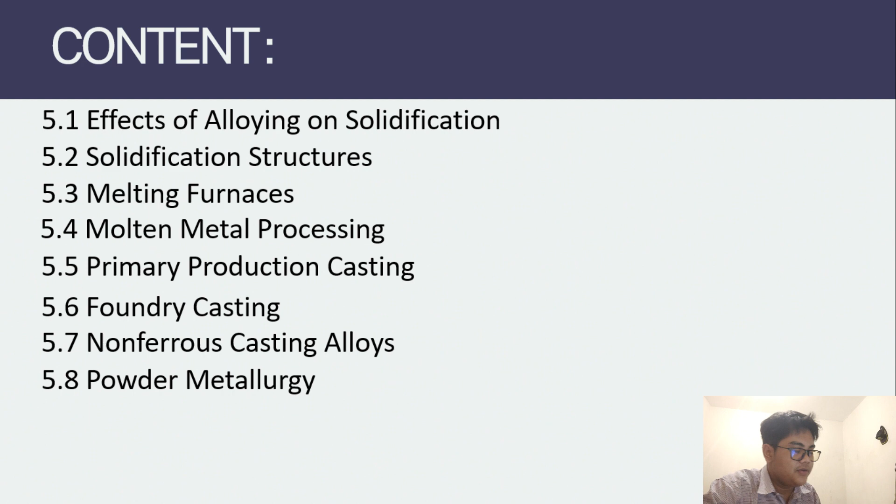We go to the content: 5.1, the effect of alloy on solidification; 5.2, solidification structure; 5.3, melting furnaces; 5.4, molten metal processing; 5.5, primary production casting; 5.6, foundry casting; 5.7, non-ferrous casting alloys; 5.8, powder metallurgy.

We jump to 5.1, the effect of alloy on solidification. The solidification of alloy is a complex process and is most easily understood by explaining how the solidification characteristics of alloys differ from those of pure metals. This is a topic discussed to some extent in chapter 2 and is briefly expanded in this section.

We got solidification of pure metals. When a pure metal begins to melt, the solid-liquid mixture stays at the melting point temperature until all of the solid has completely melted. The amount of thermal energy needed to complete the transformation from solid to liquid is defined by the latent heat of fusion of a material.

For example, pure aluminum begins to melt at a temperature of 660 Celsius and has a latent heat of fusion of 398 kilojoules per kilogram. If 1 kilogram of solid aluminum is heated to 660 Celsius, then the addition of 398 kilojoules of thermal energy would be required to completely melt the aluminum.

Although heat may be continuously applied, only after the material is entirely liquid does the temperature begin to rise again. Conversely, pure metals give up their latent heat of fusion and solidify at a single temperature. If a pure metal is melted and allowed to solidify in a melting crucible, a thermocouple placed in the metal during solidification could trace a cooling curve like that shown in figure 5.1.

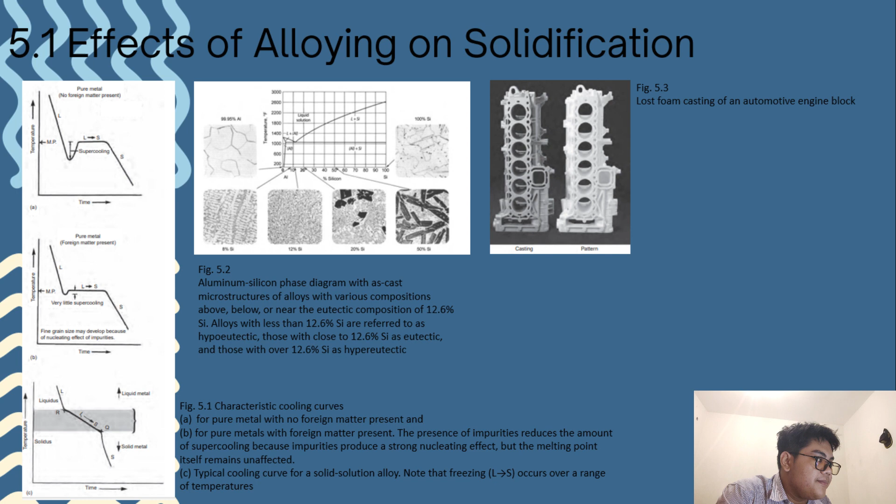We go to the next, 5.2, solidification structure. The solid-liquid interface during solidification normally exhibits one of three types of crystal growth in the liquid: planar, cellular, or dendritic growth, as shown in figure 5.4, where we can see the effect of undercooling on solidification structure.

The type of growth is controlled by the manner in which heat is removed from the system. When the liquid ahead of the solid-liquid interface has a positive temperature gradient, heat is removed from the liquid by conduction through the growing solid. Because the temperature gradient is linear and uniformly perpendicular to the interface, a smooth interface is maintained, and the growth is planar into the liquid.

When there is a temperature inversion and the temperature decreases ahead of the solid-liquid interface, then either cellular or dendritic growth will occur. The difference between the two is a matter of degree. Small undercoolings tend to produce cellular growth, while large undercoolings tend to produce dendritic growth. In pure metals, undercooling can result from thermal supercooling, while in alloys it can result from a combination of thermal and constitutional supercooling.

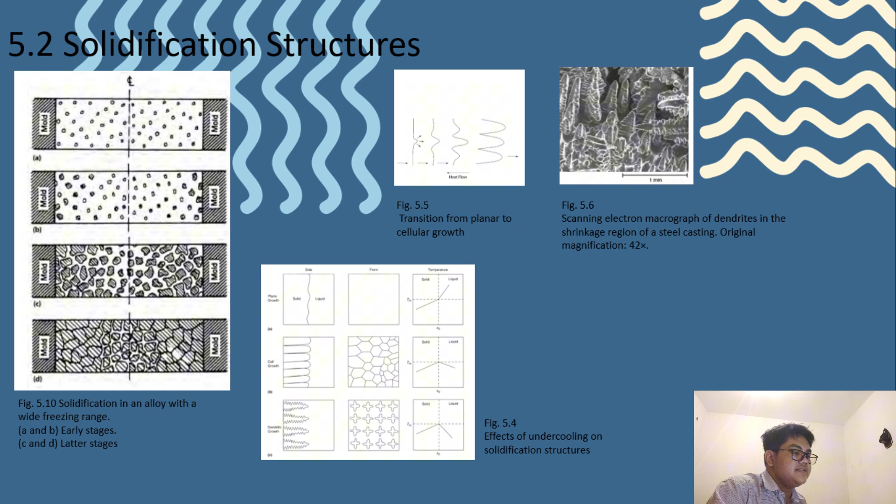Next, we got 5.3, melting furnaces. A wide variety of furnace technologies are available for melting metals. In steelmaking, for example, pig iron is produced in a blast furnace from iron ore, limestone, and coke because it contains excessively high levels of silicon, manganese, carbon, and other elements.

In figure 5.11, we can see the microstructure of a thixocast or semi-solid processed magnesium alloy. In figure A, we can see conventional etching, and in B, electrolytic etching and polarized light illumination. In figure 5.12, we can see a schematic illustrating the morphological transition under forced convection to develop a semi-solid structure.

The liquid iron, together with scrap and fluxing agents, is then introduced into either a basic oxygen furnace or an electric arc furnace for further refining with oxygen. The objective is to reduce the silicon, manganese, and carbon to acceptably low levels in the resulting steel.

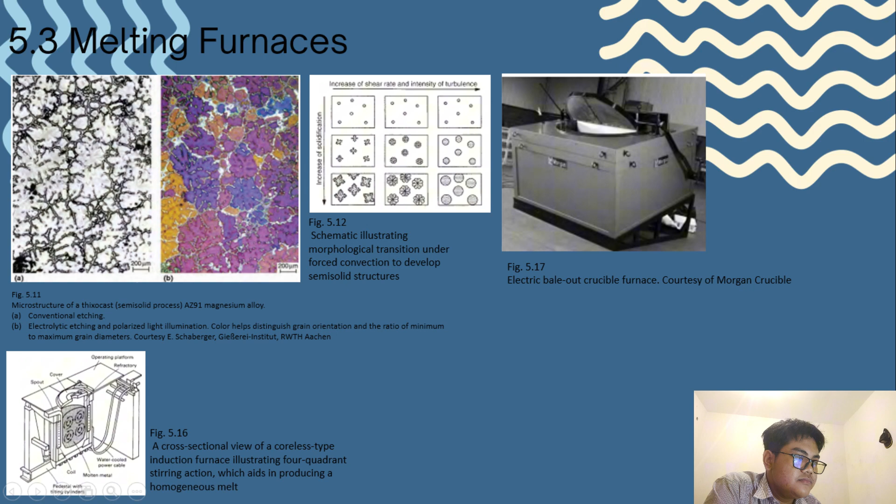Then we got to the next slide, 5.4, molten metal processing. Molten metals are processed and handled in various ways depending on the alloy and melting practices that are used. Melting is a basic way to combine elements for the purpose of alloying, and the overall chemical composition of the molten alloy must be carefully controlled and processed before casting can take place.

The reactivity of molten metal at high temperatures also requires special processing techniques for removing or preventing the formation of inclusion impurities or dissolved gases in the melt. As noted, ladle treatments may follow furnace melting, and various examples of ladle treatments for steel can be seen in figure 5.14, the examples of ladle treatment used to refine molten steels.

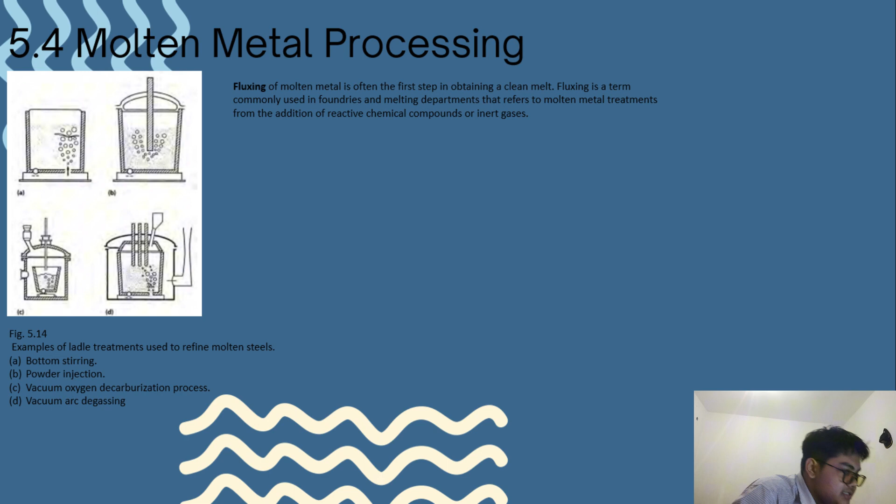We get four pictures here: A, bottom stirring; B, powder injection; C, vacuum oxygen decarburization process; and D, vacuum arc degassing. When a primary furnace is emptied into a tapping ladle, the steel can be transferred into other ladles, furnaces, or vessels for treatment. With ladle treatment, steels with sulfur as low as 0.002% can be produced that are essentially free of oxide or sulfide inclusions.

Then we get to fluxing. Fluxing of a molten metal is often the first step of obtaining a clean melt. Fluxing is a term commonly used in foundries and melting departments that refers to molten metal treatments from the addition of reactive chemical compounds or inert gases. The various functions of molten metal fluxing additives, either singly or combined, include:

A. Removing inclusion impurities or dissolved gas from the melt. B. Preventing excessive formation of solid phase inclusions. C. Preventing or removing oxide buildup on furnace walls. And last, injecting or distributing alloying constituents.

Those fluxes are commonly used to some extent with virtually all molten metal operations, both in a foundry and in production of mill product. Fluxing can occur throughout the various stages of melting and handling of molten metals, from the melting or holding furnaces to the transfer ladles. Molten metal fluxing agents may be chemically active solids, inert gases, or a chemically active gas. The type of flux depends, of course, on the composition of the melt and refractories.

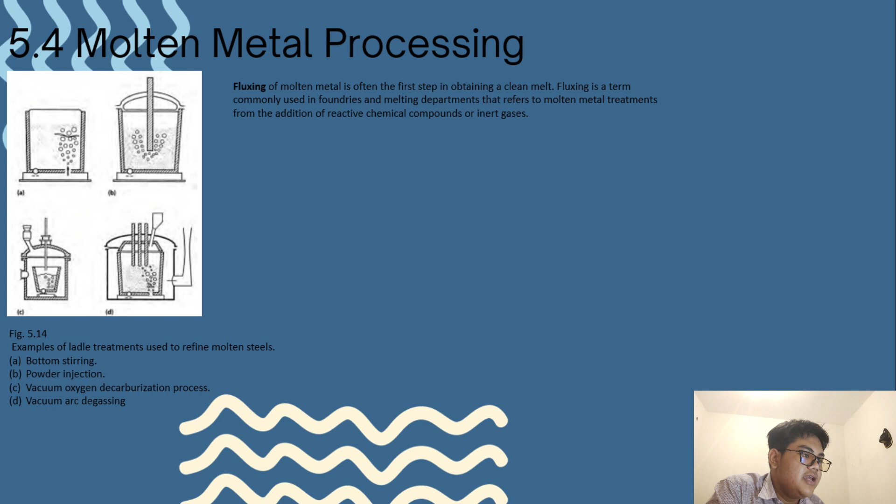Next, we get 5.5, primary production casting. The primary production of metal normally involves either ingot casting or continuous casting of products such as strip, sheet, wire, or bar. Continuous casting offers certain benefits over static casting, but not all metals can be continuously cast. Products are typically cast in ingot form for subsequent hot working reduction operations.

Static ingot casting. Several ingot casting processes have been designed and developed for downstream manufacturing processes. The most common is static ingot casting, where molten metal is poured into a vertical open-ended mold. The mold is made of metal, usually cast iron, and is tapered along its length so that solidified metal can be easily withdrawn from it. The fundamental requirements that must be satisfied by an ingot are capacity to withstand subsequent mechanical reduction operations without rupturing or cracking, with the capability to yield a commercially acceptable finished product.

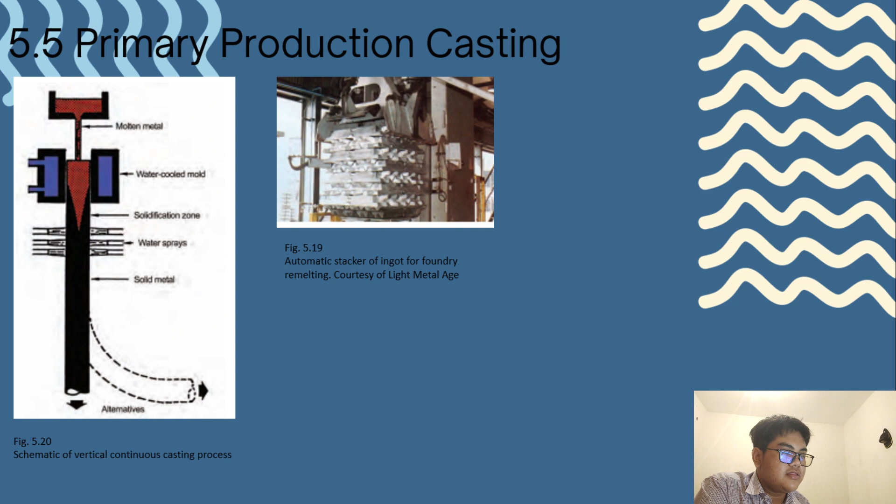In another process, the product is bent so that it emerges horizontally from the casting machine. With this setup, casting time is limited only by the amount of liquid metal that can be supplied to the caster. The product can be cut to any desired length, or it can be fed directly into other processing equipment. Specific grades of aluminum, stainless steel, and copper are commonly produced using this method.

Aluminum casting alloys. Aluminum casting alloys are the most versatile of all common foundry alloys and generally have the highest castability ratings. As casting materials, aluminum alloys have these favorable characteristics: 1. Good fluidity for filling thin sections. 2. Low liquidus temperatures relative to those required for many other metals. 3. Rapid heat transfer from the molten aluminum to the mold, providing shorter casting cycles.

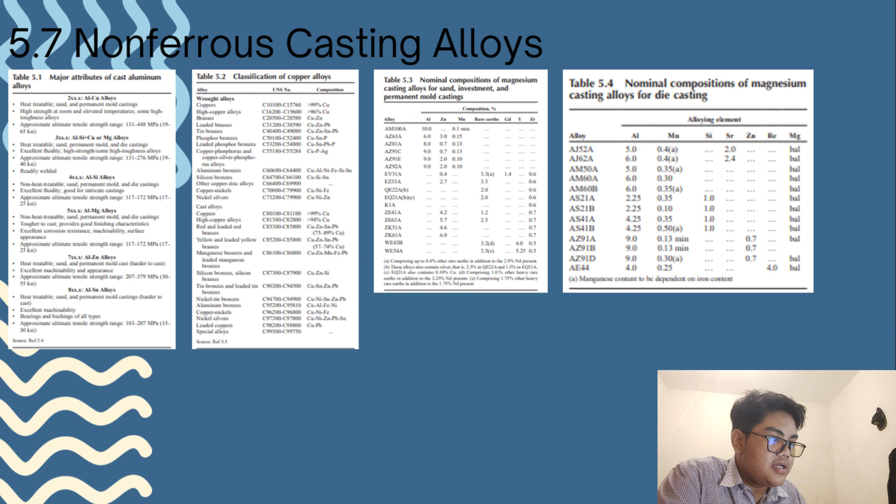Okay, we go to next, 5.8, powder metallurgy. One of the more recent metallurgy developments in the manufacture of modern alloys is the development of powder metallurgy, or PM processing. Metal powders can be produced using a wide variety of mechanical methods as well as by chemical and electrochemical methods. Atomization is the dominant method for producing metal and pre-alloyed powders from aluminum, brass, iron, low alloy steels, stainless steels, tool steels, superalloys, titanium alloys, and many other important industrial alloys.